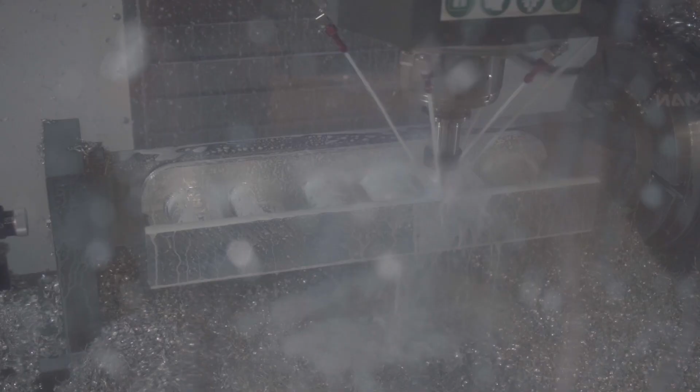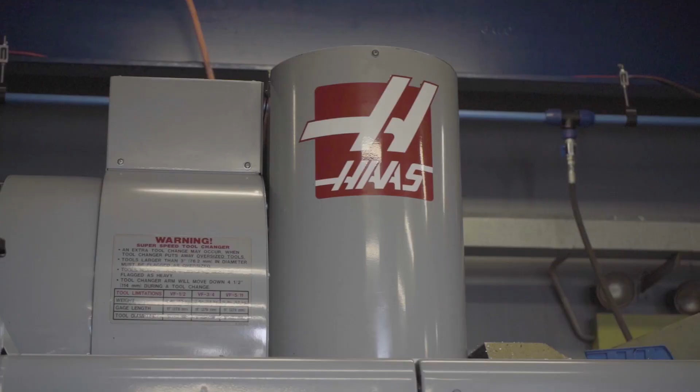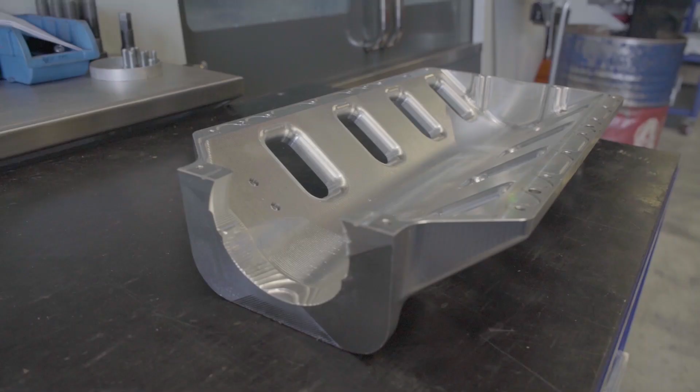We've got, as you can see, some Haas mills and a lathe here. Everything that you buy and that we sell is 100% made in-house, all designed in-house, from the clamps, intake manifolds, you name it, we make it here pretty much.

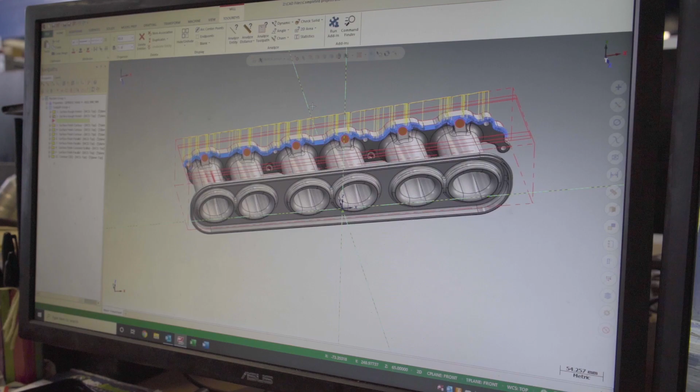This is pretty much the brains of the operation on the computer here. We run the latest version of Mastercam CAM software. Without this, these machines are worthless. You've got to have good toolpaths, good 3D modelling, and a good understanding of how to machine products, speeds and feeds, what size cuts to take, roughing cuts, finishing cuts, that kind of thing. So without this, this whole section would not run.

So all the toolpathing, 3D modelling, everything is all done on here. It's all done on the shop floor, so we can make little changes on the run.

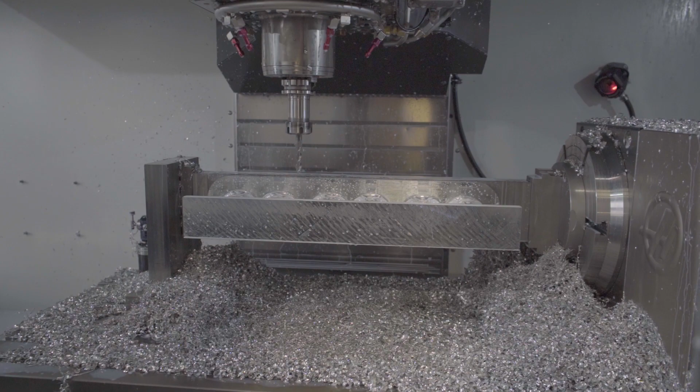Actually, the one I've got here is a 2JZ. This is going to be the latest revision, we're making a new batch now. We've just made a couple of little tiny changes to it aesthetically, just to make it look a bit better. Changed the runner design just slightly, just to get a bit better flow. We do a lot of flow simulation here, and that's why our intakes are the best on the market, and we have about 1% difference or less than 1% difference between all the runners.

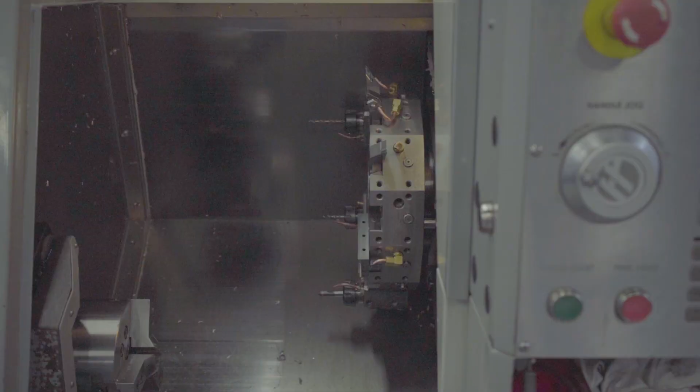We sort of walk along. We've got a lathe here. We make all our own weld-on fittings and stuff in-house. We just finished making up a bunch of little weld-on fittings for our intercoolers, just a little weld-on bung with an M8 thread in it. We've just made about 1,500 of them. That's constantly going, making all our Plazmaman clamp weld-on ends, all our little vacuum fittings, our fuel fittings, everything we make here.

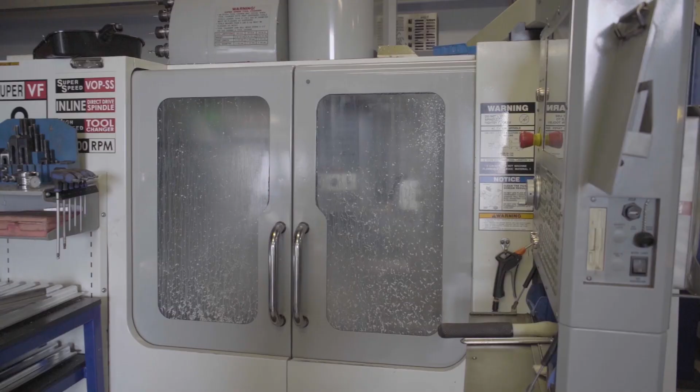Got a couple of smaller mills here. We're just doing little bits and pieces, we're actually in between setups at the moment. On this one here, we're making some fuel rails.

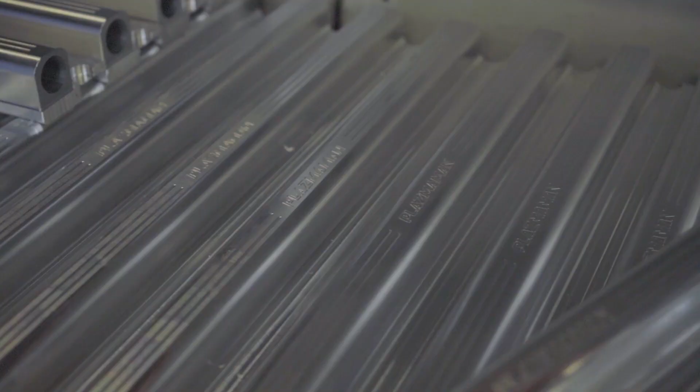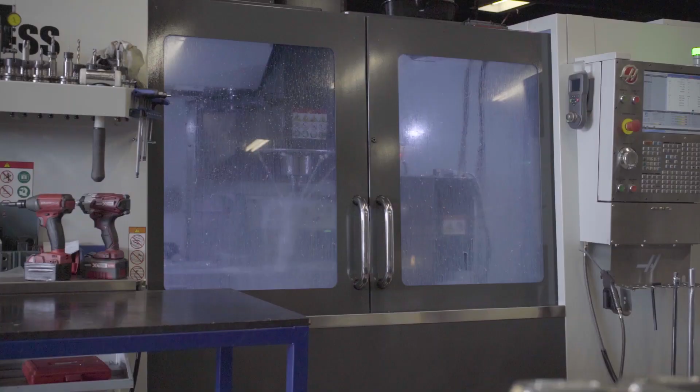All our fuel rails are 100% billet and fully machined in-house. They're not just a piece of extrusion that someone's run a bit of Scotch-Brite over and sells as a billet fuel rail. Ours are all 100% machined, every face machined, all over. That's every fuel rail, OEM replacement, billet manifold ones, everything. They're all 100% machined.

This machine is just making some runners for our latest release, the LT1 to 4 manifold, the latest Gen 5 LT. So that's a bank of 4 runners for the manifold. From scratch, that takes about 5 hours to complete, from a bare rectangular block to this finished product.

If you walk along here, we're making some 2JZ manifolds, what I just showed you on the screen. So that's sort of halfway along there. I've just stopped it to stop the noise so we can make this video, but they basically start off as a square block like this, and then they go on the machine, and then they'll come off after about 4 hours or so as a complete finished 6-cylinder manifold.

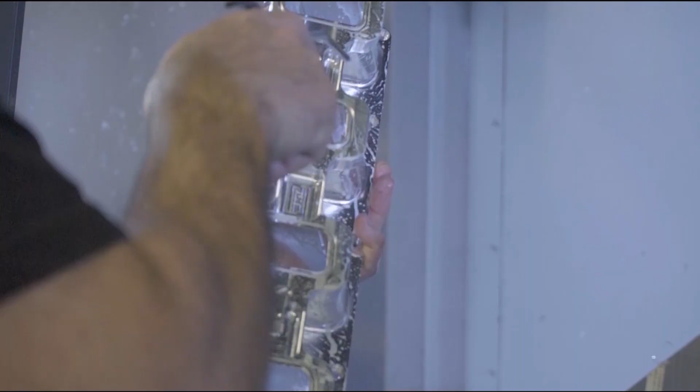We're ready to get the sheet metal dome and everything welded on. So everything we make here, everything is checked to strict tolerances. There's always a lot of quality control. Nothing will go out the door that doesn't fit, or if it has a little tiny machining mark on it or a little nick, nothing will leave out the door.

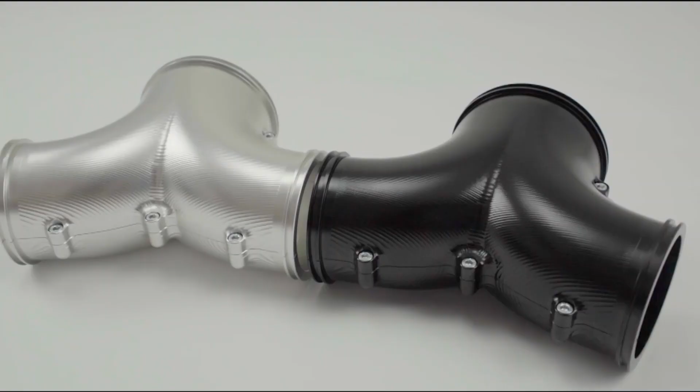We love what we do here. We've got a lot of passion for the job and take a lot of pride in all the products we make, and that way when you guys get it as the end user, you get nothing but 100% perfection when you get the product.